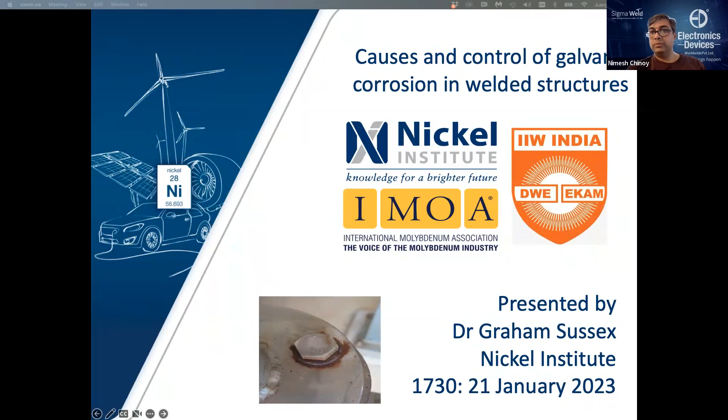Host, hello Sachin. Already passed to Mr. Jung. Thank you, I got it. Nimesh, how do you want it? You want to have the main screen up already with the introduction of the welding topic and the hosts? Yeah, that would be good. Okay, let's see. Share screen 2. Yeah fantastic, that would be the one. We wait a couple more minutes, then you can start with the introductions and I'll welcome everybody. Correct, we'll go on mute. Darren. Except Graham, of course. Maybe after an hour or so. Yeah, right.

Just while people are joining in, another 2 minutes.

We just recently, today was the last day at the National Welding Seminar at Chennai in India by the Indian Institute of Welding, and they celebrated 50 years of the branch's inception. It was a good session. We had a lot of talks from senior scientists from the Indira Gandhi Center for Atomic Research and other places, and it was a good 3 days of many interesting topics of discussion, including some 3D printing with metals and also a lot on the nuclear side. So I think all in all, it went well.

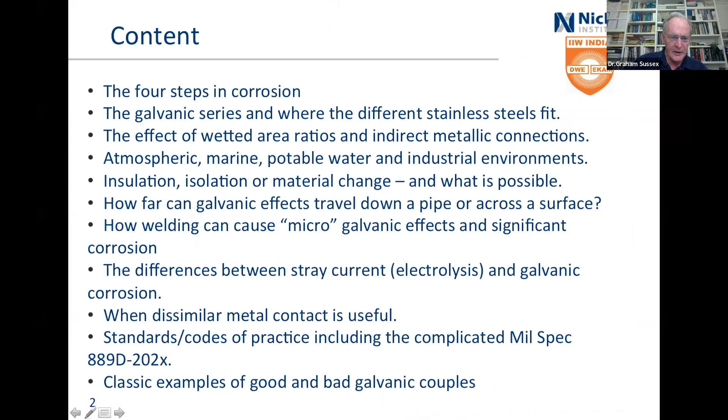This is the 4 steps of corrosion. Everybody thinks that it's basically the piece of metal falls apart and releases positive ions, but it also releases electrons into the metal, because obviously you can't go separating charges. So then the electrons flow from there to the cathode. Now that may be a metal, it may be all sorts of things, but yep, it does that. The third step is those electrons reacting at that point. The final bit, and the bit that's absolutely critical, is that you've got to have an electrolyte, and the electrolyte has both the anode and the cathode in it. So you need all 4 of those, okay? If you stop any one of them, then the corrosion just stops dead.

If you're talking about dissimilar metal corrosion, then you may wind up with precipitating a metal if it's in a solution of ions, or if you're talking about a piece of stainless steel, then you may wind up with the electrons just forming hydroxides with the water or the oxygen. You can fix it up by changing the materials or changing the environment. And if you're talking about dissimilar metal corrosion, you won't get an acceleration effect unless one of the metals in the pair will corrode or be close to corroding. Otherwise it just doesn't matter. So if you're putting, say, 304 and 316 together and they're in a solution where neither will corrode, then you'll get absolutely no effect.

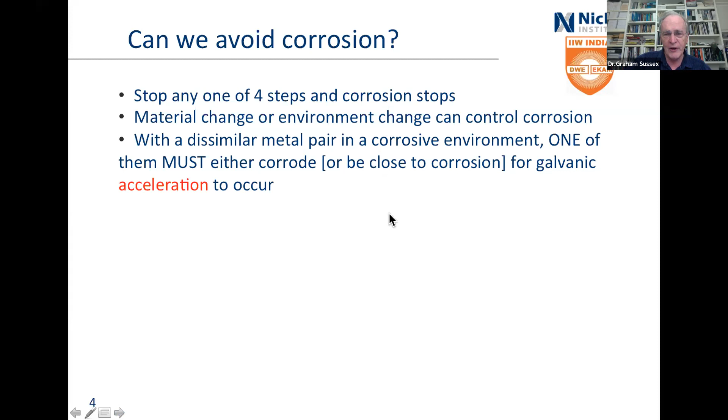If you're talking about submerged or buried environments, you can actually apply an external current - that's nothing to do with dissimilar metals, that's just applying a current. You can get cathodic protection, which decreases the attack, or you can have stray currents. I'll talk a bit later about stray currents and how they're different from dissimilar metals. Basically, corrosion is an electrical system, so you can fiddle with it by applying currents.

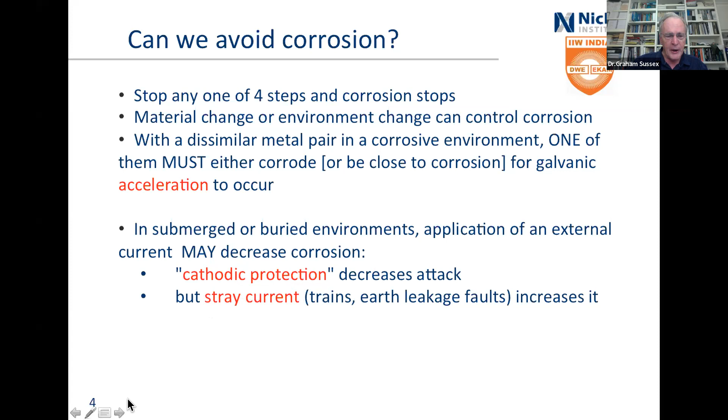This will be very familiar to people. This is straight out of ASTM G82, and the references here - you've got various metals and they have various potentials, measured against a saturated calomel electrode, which is convenient laboratory equipment. You can also use silver chloride, copper sulfate, or for research work, though rarely done this way, a hydrogen reference electrode.

These things go from very, very dissolving metals at the bottom, right up to graphite at the top corner, where you get no corrosion basically. This chart is for flowing seawater at about 30 degrees C, and note there are little black bits on, say, 316, or a white bit open - that's basically the two states it can occur in.

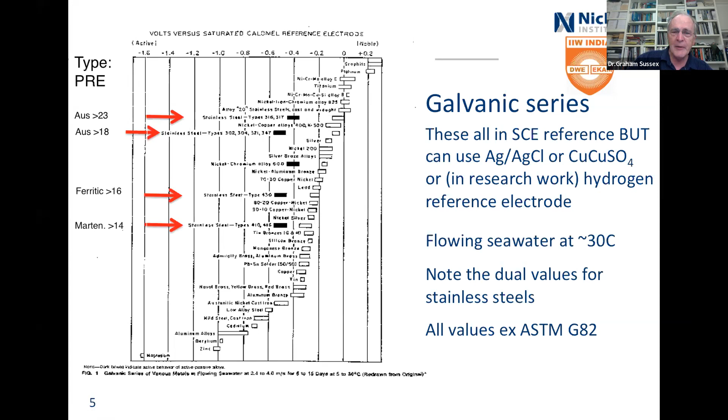If it's white, that's where you want it to be - it's not corroding. If it does break down and start corroding, the potential pulls back down there. That's the same thing that's happened for 316, for austenitics at 18, so a 304, down to a ferritic at about 16, or a martensitic at 14. All the stainless steels have this dual arrangement, but because you don't want your stainless steel to corrode, it should be in the zone with the open square.

There's an FAQ on the ASSDA website which has much the same sort of thing. This is a similar chart, but rather less cluttered, just to show you a little more clearly - it's for seawater at 10 degrees C.

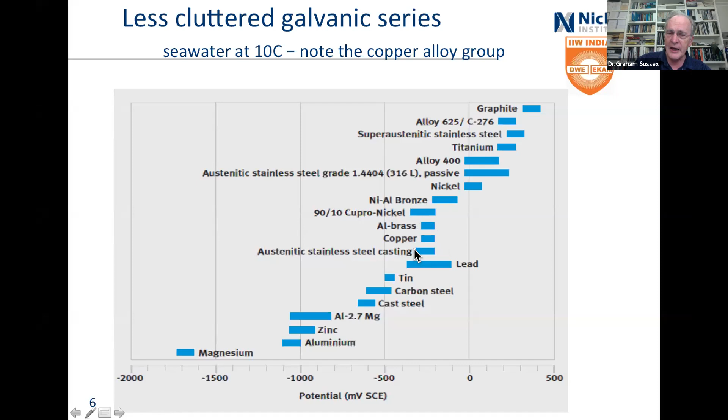What I'd like to point out to you is this group of alloys: nickel aluminium bronze, 90-10 copper nickel, aluminium brass, copper, even austenitic castings, are all at about the same potential. So if you connect them together, it's really not going to be an effect in terms of dissimilar metals.

There are other things outside though. This is from Roger Francis's stuff, published by Francis and Byrne, looking at a super duplex stainless steel in seawater. So normal seawater, it sits at about that sort of potential.

You've got a biofilm on the surface, you've got a bit of oxygen there. If you heat the thing up, 20 or 30 degrees more, then no biofilm, no potentiation of the oxygen, and so it drops to there. You can deliberately deaerate it, pull it down to there, or if you completely deaerate it, down to that point. If you want to go the other way, then chlorinate it.

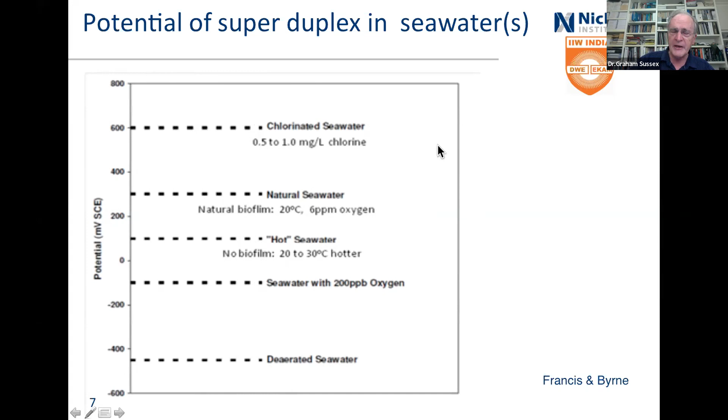Put in 0.5 to 1 milligram per litre chlorine continuously - that's quite a bit, but still. What I'm saying is that it's not only a matter of the material itself, but the environment it's in. I've just been talking about oxidizers - chlorine and oxygen - the microbes, and the temperature, because the temperature does things for the microbes.

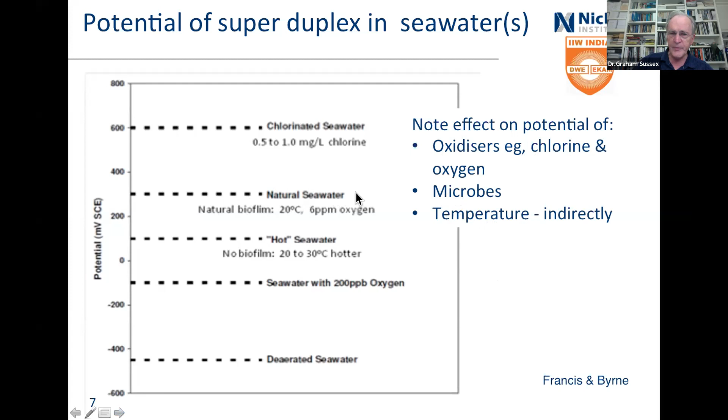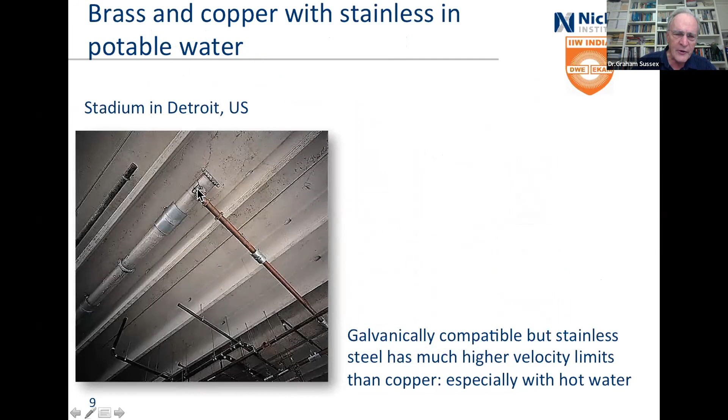Low galvanic - this is an example, a stadium in Detroit. We've got copper here, we've got a bit of brass - oh no, there's no brass there - and this is stainless steel, no corrosion. This is in a hospital in Scotland: brass, stainless, copper, stainless steel. They're all compatible because of their fresh water.

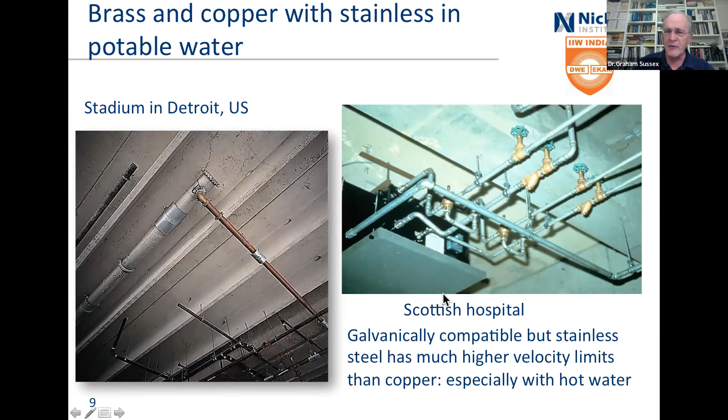This is a freshwater series, and the reason I'm putting this one up is because the graph is reversed. So here we've got the high potentials or low potentials on that side and high on this side, and still we've got the things that are going to corrode right down this end and the things that aren't going to corrode down the far end, and you've still got the sort of S shape in it as well.

Again, you've got this batch in the middle where the potentials are all about the same, so if you put any of those together, they're not going to corrode, not galvanically.

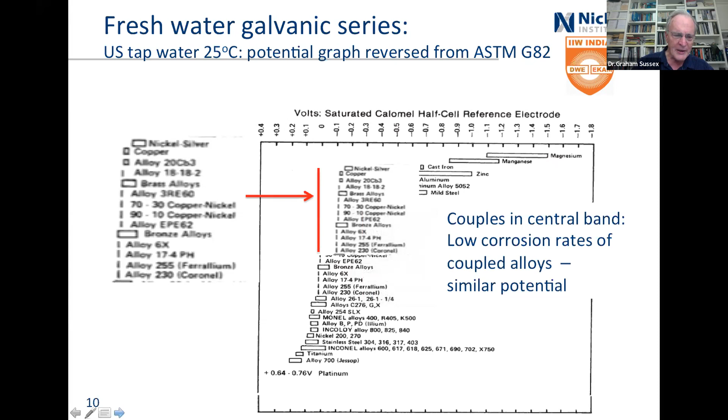But you can also get these sorts of charts in various other things. So here we've got tap water, distilled water and seawater in the middle, hydrochloric acid over here, and nitric acid over here. Why do you do that? Because you've got very, very strongly reducing hydrochloric acid, very, very strongly oxidizing nitric acid, and these are the sorts of potentials that you will get on various metals. This is basically putting a line rather than the names of all the various elements.

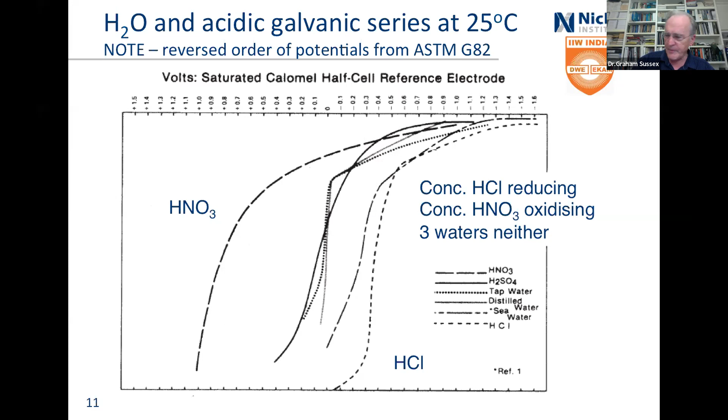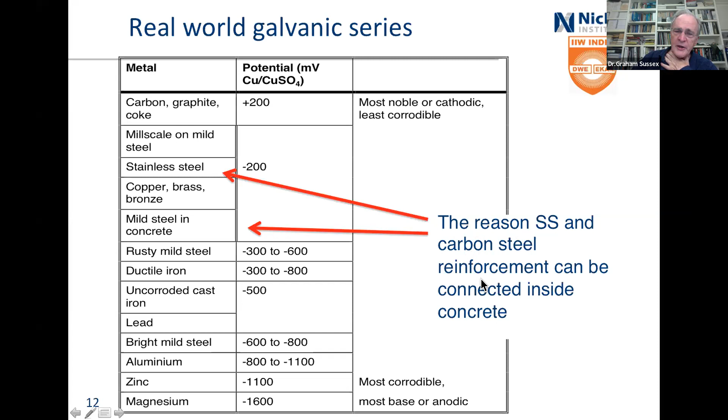Real world, things are a bit different. I just thought I'd put this in to give you an indication. Here we're talking about stainless steel, mild steel in concrete, and they're about the same potential, which is the reason why stainless steel and carbon steel reinforcement can be connected inside concrete. It's one of the questions that keeps coming up, despite the fact that it's been absolutely proven for a long time, 20, 30 years, that you have no problems putting those two together if they're inside concrete, and it's simply because the pH is way up.

Okay, so let's look at some real examples. Here is a bit of a stainless steel tank, and here is a copper pipe coming into it. As you can see, the copper pipe has got quite a significant bit of corrosion. Why? Because there's an enormous area of stainless steel, and so it overwhelms this. So it's not just the potential, but it's also the relative area of the two.

Here we've got, it looks beautiful, doesn't it? But it's all rust. It was a tank, a bolted tank, and they started getting leaks. So they put in a piece of stainless steel inside to bolt things up to it. What they didn't do was isolate it from the tank, because it's a painted tank. At the cut edges, there was an exposed amount of steel, and so it corroded, and it very rapidly got this sort of appearance. They wondered what on earth it was. It was pretty straightforward, but they just had to change the way they put it together.

And when I say treated water, it's basically the water that's used for flushing toilet systems.

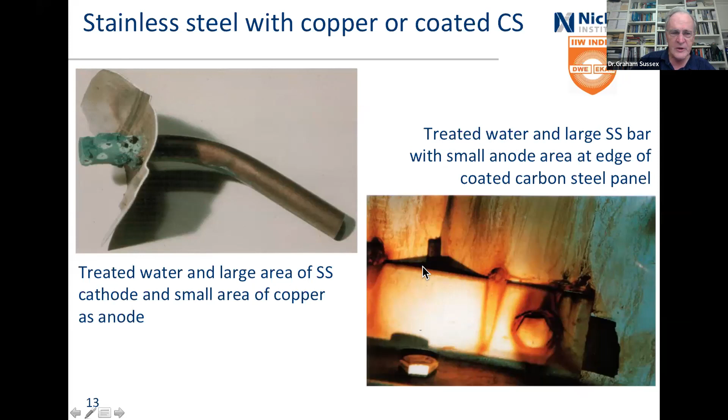And the inherent passivity of the stainless steel - I'll talk about this a bit later in terms of numbers - but there isn't an awfully good effect as a cathode, actually using the electrons up by the stainless steel. And quite apart from that, it's fairly obvious that there would be anodizing to actually prevent the corrosion of the aluminium as well.

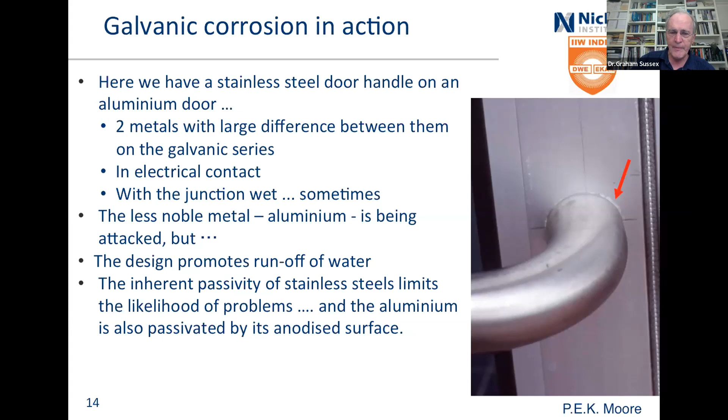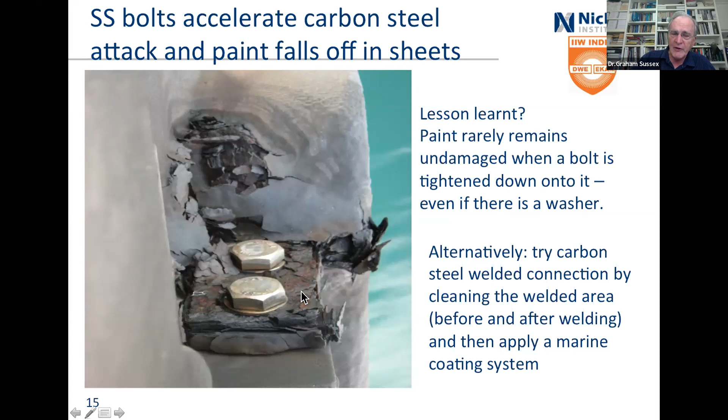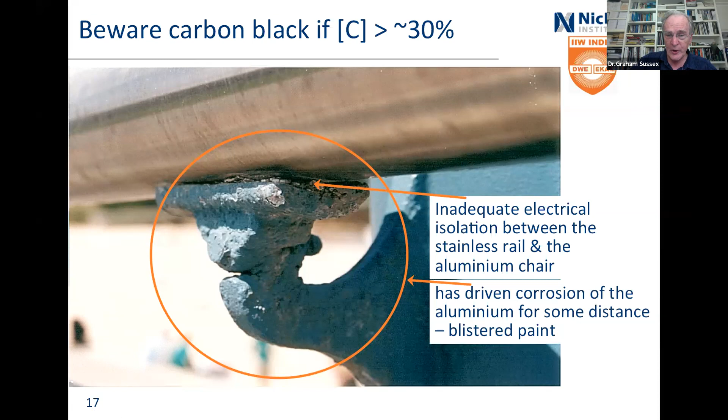So what you can see is that you've got attack of the aluminium underneath the paint, and the paint's blistering off. So it's driven corrosion down here, and you wonder what's going to happen. Well, that's what happened - the whole thing fell off.

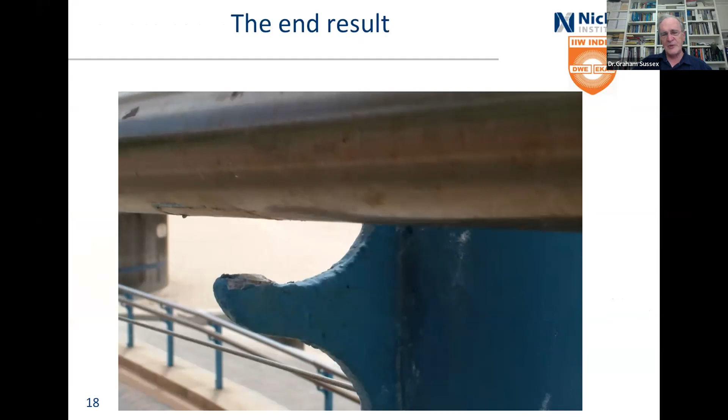Now how could they have fixed that? Well, they could have used a proper insulating material, but in fact they should have thought perhaps and put stainless steel on this support.

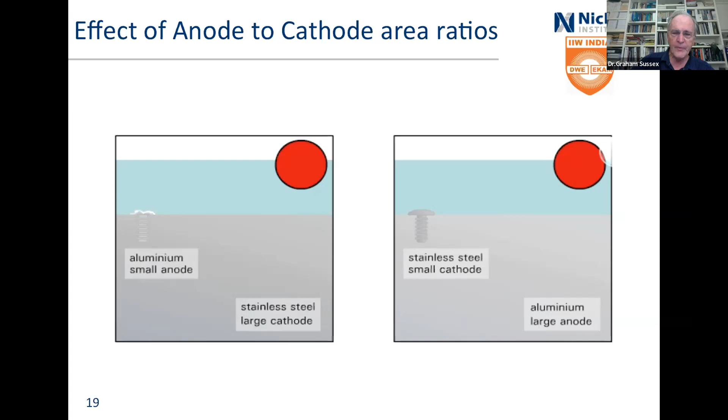How do you get around that? Well, you could paint the stainless steel and paint the aluminium. Both would work. Rather difficult to actually avoid having the connection underneath.

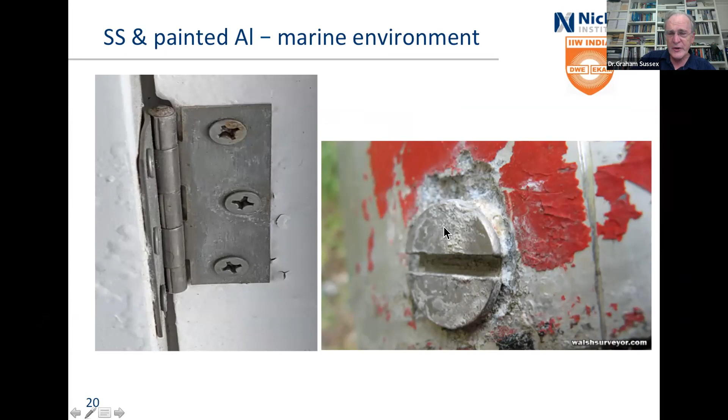And this is the other example I showed on the front page. Here again, you really are going to have a problem with this sort of fitting. Yes, you could paint the whole thing, and you'd have to paint all over the stainless steel, or you could weld the whole thing, and then, yes, okay, if you're welding aluminium to aluminium, that's fine. If you're welding stainless steel to aluminium, bit interesting, but you'd need to have some sort of coating to stop the thing.

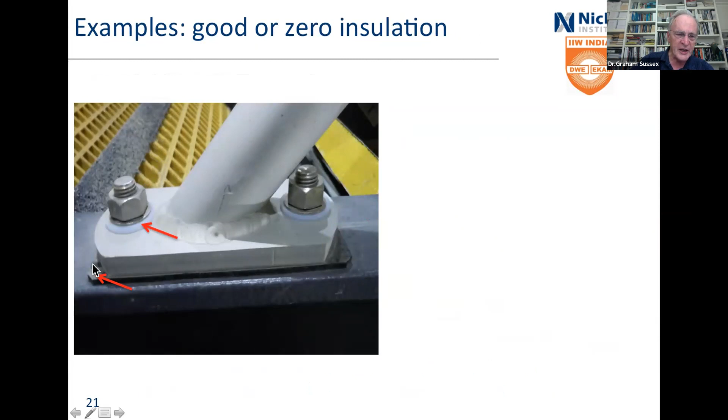And yes, that's basically what I've said - you can put in insulation. Obviously here we've got steel, here we've got aluminium, and washers there, keeping them off. And this is the example on the front where there's no insulation at all, and it's just a standard 316 fastener.

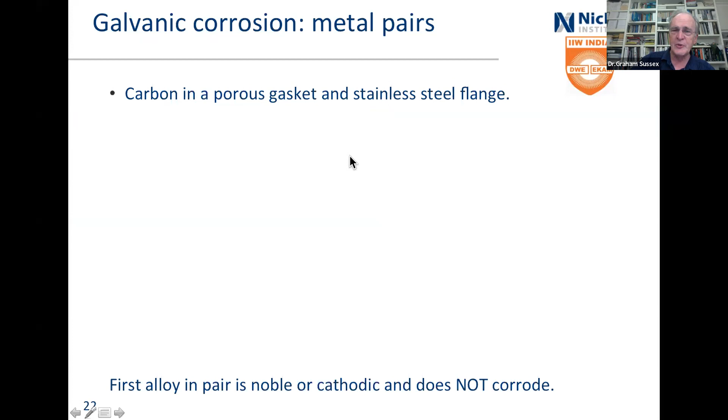So let's look at a few examples. Carbon in a porous gasket on a stainless steel flange - well, you've already seen that with the super duplex. Stainless steel and aluminium, think about the door handle - yep, it may be okay because stainless steel is not a terribly good cathode, and the aluminium, it's well different, but it may well have an anodized layer on it.

Stainless steel and galvanized steel, the severity there is very much going to depend on the environment, because if it's a strongly corrosive environment, then yes, this galvanized steel will suffer. But if it's reasonably inert, then you probably won't get terribly much. Mind you, both of these need a reasonable amount of rainfall on them in order that they're not going to actually corrode, full stop. Stainless steel and carbon steel - well, yes, every time you get that, we have all sorts of strife.

Galvanizing and carbon steel - let's get away from stainless for a moment. It's okay for roofing, old galvanized. In Victoria, or in Australia, they call it galvanized iron when they actually mean galvanizing on carbon steel. But if you look at the old system, they used to have galvanized pipes going into hot water tanks.

And in some waters, some bicarbonate waters, if you got the temperature over about 65, there was a polarity reversal. So the galvanizing didn't dissolve, the carbon steel dissolved. So every now and then you need to think a bit carefully about what's going on.

Carbon and aluminium, well, yes, they're far apart. Do you ever get a problem? Well, yes, I've seen a couple. One was an aluminium tray truck used for carting carbon black, and they spilled bits of it. They got some salty water on it, and they wound up with holes in their truck.

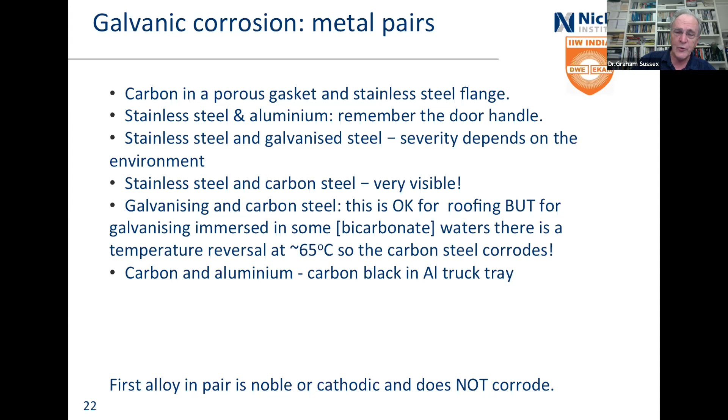And carbon black loading in insulating washers for roofing screws, Tek screws as they're called here. If you get more than about 30% carbon, you can get continuously conducting electrical networks, and away it'll go.

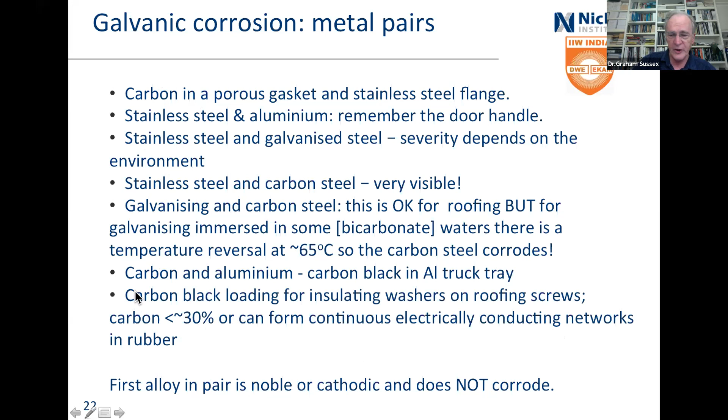In each of these pairs, the first one listed is noble or cathodic, and it's not going to corrode. So I've talked about what corrosion is, what potential ranges there are and how they can change, and a couple of examples of galvanic attack.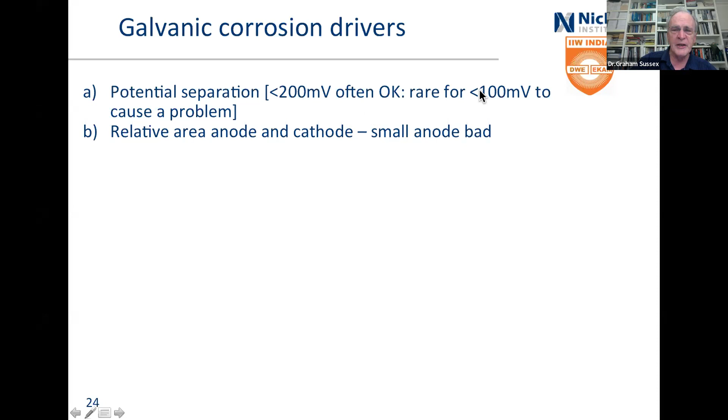And that's what this example is about. The thing is that stainless steel really isn't a terribly good cathode. It has a fairly low passive current density, around 10 nanoamps per centimeter squared, nano as in 10 to the minus 9. Both metals are going to be at the same potential if they're corroding because they pull in together. But the Tafel slope for stainless steel is about 120 millivolts, and you need at least a microamp per centimeter squared to corrode. I'm getting awfully electrochemical and technical, but basically I'm just trying to point out that stainless steel is not a good cathode, and that's why.

Physical distance and geometry, how far apart things are, can be quite important. Talking about pipes, it's going to depend on the diameter of the pipe and the conductivity of the fluid. In seawater, you've got about 10 diameters for 50 millisiemens per centimeter versus about 3 diameters for freshwater. Keep that in mind when you're putting in a separation or a sleeve down a tube on a heat exchanger—it depends very much on the conductivity of the material, how far down you've got to shield, and the corrosivity or oxidizing capacity of the solution.

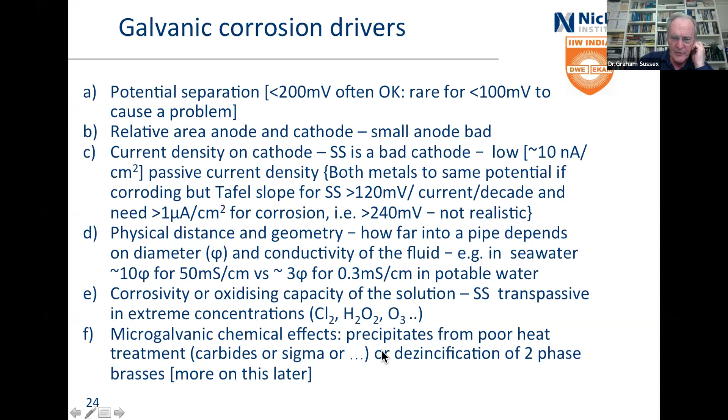This is to give you an indication of how far apart you have to have things before you don't have to worry about what's going to happen and what the environment is. This is looking at zinc protection across a carbon steel flat surface because it's a relatively easy thing to measure. Surprising how far things will go. At 100% relative humidity, you get very little protection, very little conductivity through the film that's on the surface.

If you spray it with deionized water cyclically, nothing's going to build up—it'll wash clean. If you're putting tap water continuously on it, the tap water is going to be a bit more conductive, depending where you are, and it's going to spread a bit further. Urban atmospheric conditions basically depend on whether you're down beside the sea or out in the middle of the desert or in a standard urban environment. The tap water cyclic spray versus continuous tap water—there's not a lot of difference, but you can get building up concentration, giving a bit of conductivity across the surface. Then there's sodium sulfate spray, seawater spray at 5%, or continuous immersion.

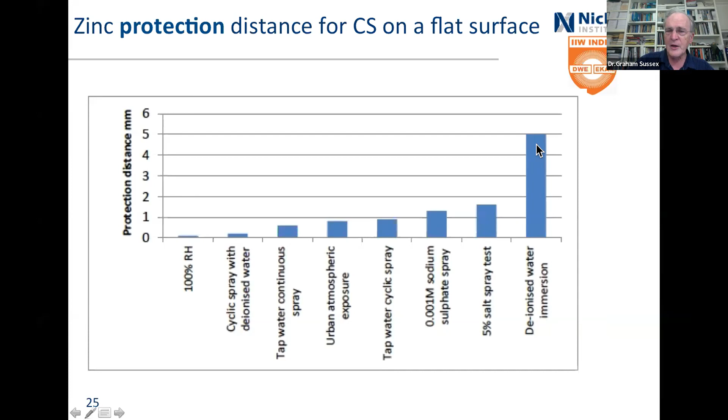With deionized water, it's not a great conductor, but it's still enough that you could go 5 millimeters or so out. What does that mean? It means all the electrochemistry is happening—if you've got a fastener or something sitting there that's going to cause galvanic corrosion, then the area around it, in this case within a 5 millimeter diameter circle, is also going to contribute. If you had seawater, you'd go out even further. So effectively you're measuring the resistance of the thin surface film.

This is perhaps a more interesting example looking at galvanic corrosion. We're looking at hot dip galvanized steel sitting there, there, and there - the light blues - and the hot dip galvanized connected to a bit of stainless steel, at 6 times the area of stainless steel to the galvanized, so it's a bad ratio. And then we're looking at corrosion rates there in micrometers per annum.

In the urban atmosphere, not much difference. Near a steel mill, so you've got sulfur dioxide and things like that. Coastal areas where you've got salt, sea salt and so on. But it goes really through the roof when you talk about what happens with splashing - you're getting splashing on the surface, concentrating up, and away it goes.

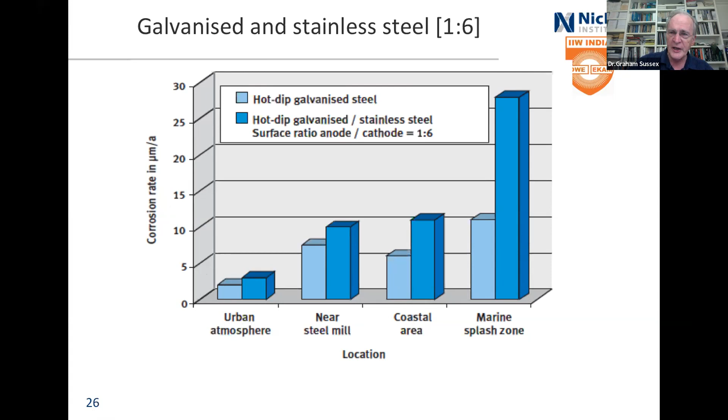This comes out of a Euro Inox publication, and there's the reference table at the end. It's basically saying the definition of galvanic corrosion: you've got an anode, a cathode, and an electrolyte sitting on top. It doesn't talk about the 4 steps, but basically the critical bit down the bottom is that one of these has actually got to be able to corrode in the electrolyte that's there. Otherwise it's got to corrode or be close to corroding, otherwise there won't be any galvanic acceleration.

I've said it before, but I'll say it again: if the cathode is going to be stainless steel, then it's not terribly efficient, and so it may not be really bad.

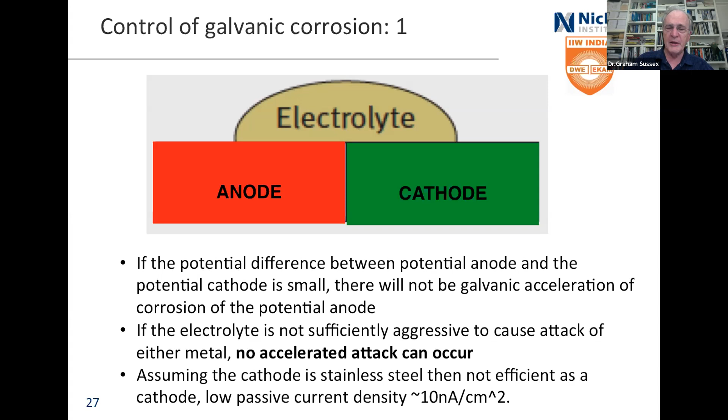Look, I know people will say, hang on a minute, what about if we put a carbon steel bolt in, or we put that washer in? Yeah, sure, it's very visible. It's not so visible if it's aluminium. It's not so visible if it's galvanizing. And it's still there, but it may not be a serious effect.

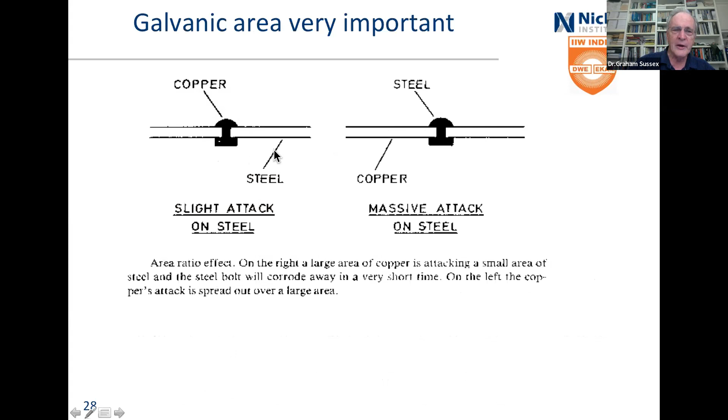And the galvanic area is very important. This is back to looking at Davy putting copper onto boats to get rid of woodworm - wooden boats. He found that the steel corroded very rapidly, and that was a problem. So then he started using the other way around, and it worked quite well, except that he didn't have enough copper there.

If the area of the anode is more than about 10 times the cathode area, galvanic corrosion is not all that likely, and it really doesn't matter all that much what the potential difference is. That's not completely unlikely, but at reasonable levels of difference, the 10 times ratio is pretty good. If you're the other way around, and the anode is 1/10 of the area of the cathode, then you're likely to be in trouble at really quite low potential differences.

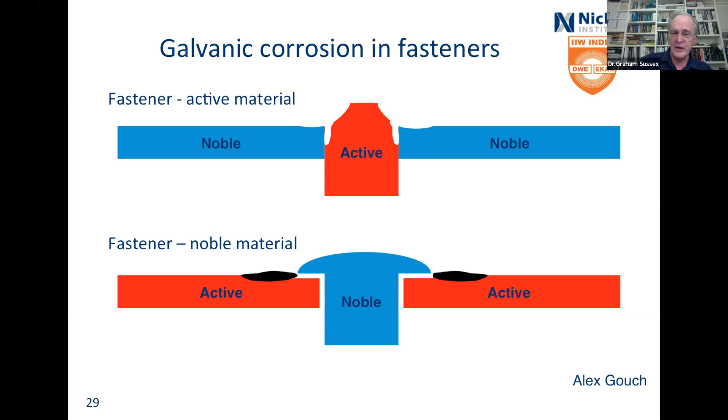So in fasteners, this is a little model: we've got fastener active, fastener noble, and what's going to happen? It's going to corrode like that, it's going to corrode like that, and it's going to fall out. That's not good. Basically what this is saying is that fasteners should always be down the bottom, more noble, and then you can get some corrosion either side, but that's not going to be really a problem. Except that if you weren't too careful about putting it in and it doesn't fit too well, then you can wind up corroding away the active material next to it, and you get a loose bolt, and eventually a loose bolt falls out.

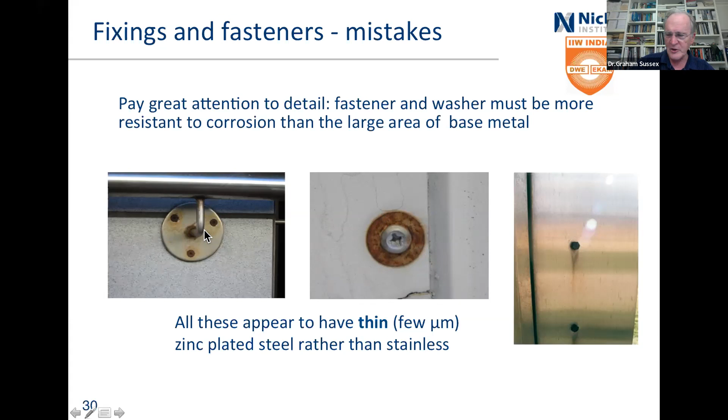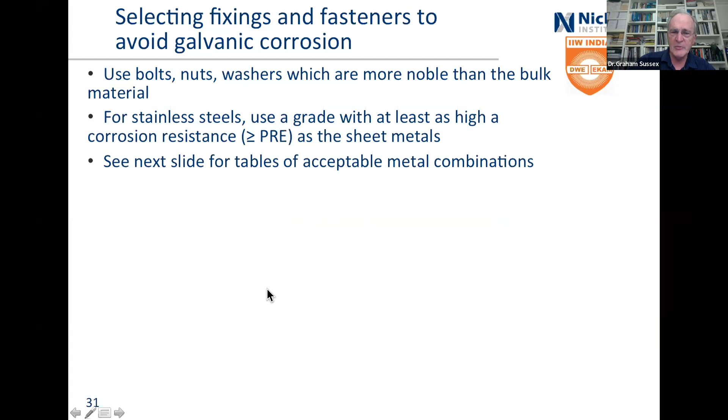So bolts, washers, nuts, they've got to be more noble than the bulk material. If you're using stainless steel on stainless steel, then you'd use the same or higher. But remember, PRE gives you the raw numbers, but if you're looking at stainless steels and the environment isn't too bad, then it's not a terribly good cathode.

Next slide's got some tables of acceptable metal combinations. And if you're going to have to join dissimilar metals, then use some insulation. Now, clearly, if you're welding something together, you can't put insulation in there, just not possible. So we'll talk about what we do then in a moment.

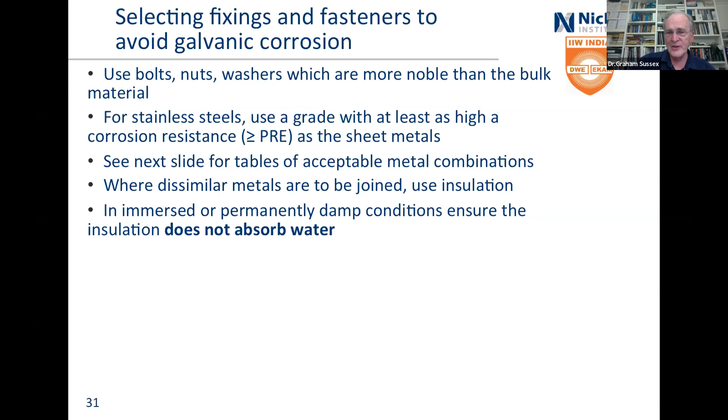If you're using insulation and it's going to be permanently damp, then you need to make quite sure that the insulation doesn't absorb water. There are some nylons that do absorb quite a bit of water, and there are other materials that do as well. So you just need to check that.

And then if you're going to insulate, you do insulation between in that direction, but you also sleeve it down here. Now you can either do it with top hat washers or just put a sleeve around that. Some diagrams leave out the sleeving around the bolt, and then you've got the probability of getting connection between and then down and around, and you lose your insulation.

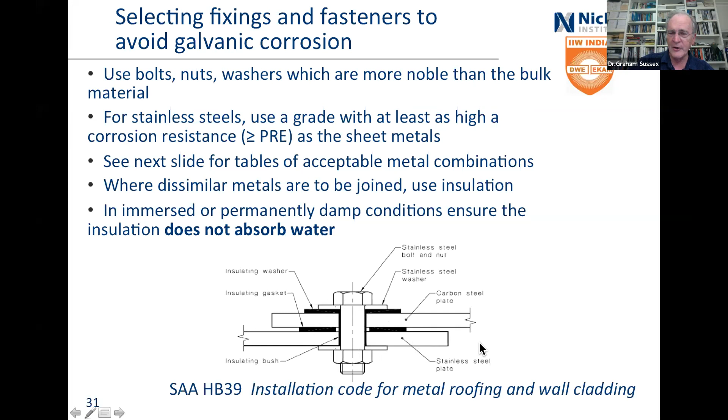Okay, back to the electrolytes. This is how you control galvanic corrosion. You make sure it's dry, or you exclude the moisture somehow or other. You make sure that you don't actually get moisture going between the two. You can put a coating, and it's shown here that you put the coating on the cathode.

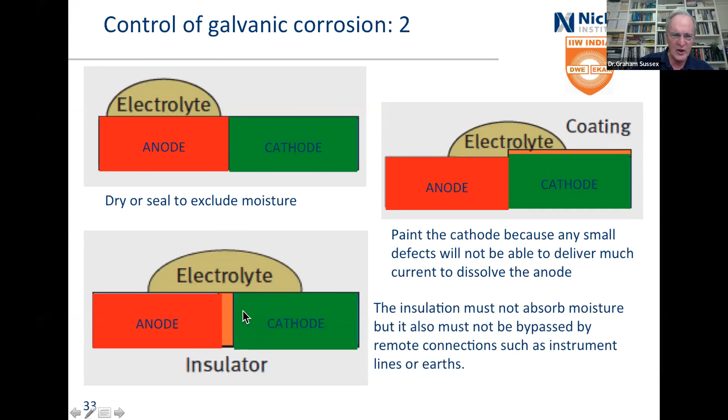I can remember looking at a submarine where there was some instances of coating, and somebody who really didn't know about corrosion was saying, okay, we'll coat over there, and I had to point out to him that no, it wouldn't work. Paint the cathode - any small defects will not be able to deliver much current. And insulation, if you've got insulation like this, then it also must not absorb moisture, but I've said that before.

Okay, so let's get serious about looking at welding and corrosion, or galvanic corrosion. Here we've got a lovely piece of stainless steel down the bottom, and here we've got a piece of painted carbon steel up the top. And we've got corrosion around there and draining down there, and that's not good.

What happened? Well, the first thing that happened was that they didn't clean all of the muck off the weld, so the paint just fell off. But typically, you need perhaps 20 millimeters - remember that diagram I showed, how far you can spread, how far you can throw the effect?

It works both ways. If you're trying to protect, it's good. If you're worried about corrosion, so if you're worried about this acting as the cathode and there's the anode and there's no paint on it, then you have to go a further distance away, greater than 20 millimeters, maybe up to 50 millimeters, just depends how corrosive the environment is.

You need to make sure you've cleaned the heat tint off and cleaned off all the muck from the weld, and do it mechanically, preferably, because if you don't, if you're doing it chemically, you wind up just etching the carbon steel as well.

And then you paint it, but you do not, under any circumstance, use an active paint. You don't go using zinc rich, because you put that onto the stainless steel, and if there's any defects in the coating - mind you, zinc rich would be a primer, of course - if you do that, then you wind up with all sorts of corrosion between the zinc, which is right up one end of the galvanic series, and the stainless steel, which is halfway up.

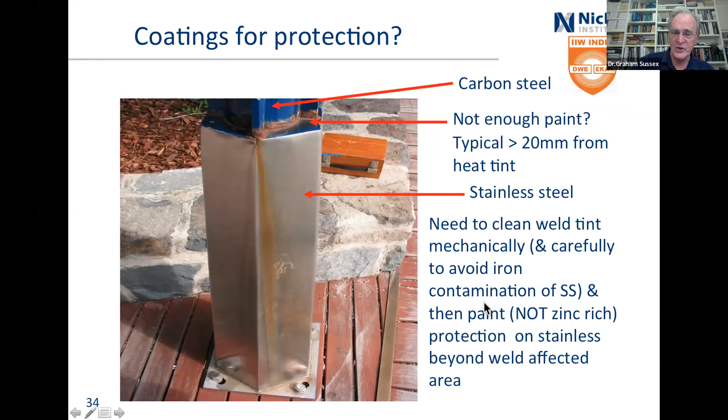And this is an example of that. Here we've got a stainless steel pipe, and here we've got a support, which is carbon steel, painted carbon steel. So you put a coating around there, but I'm emphasizing no active primer.

The width of the stripe depends on the environment, how conductive any film might be. Remember the diagram further - if you're down beside the seaside, you have to go further. If you're directly one above the other, so water can run down over it, you've probably got to go a bit further. But if it's something above it, it may not be quite so bad. You'd have similar protection of carbon steel brackets if you're talking about a vessel with doubler plates on the outside to go to your carbon steel supports.

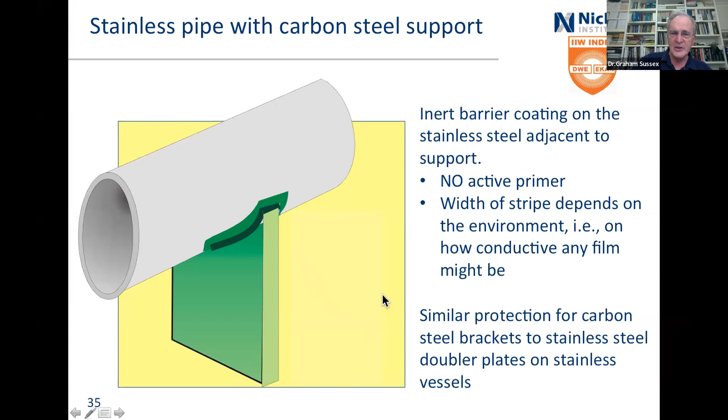Atmospheric galvanic currents flow through surface moisture films, and they're bad near the sea. Fertilizer is perhaps a problem if you're out on farms, or in the Middle East where lots of salt blows around on the sand and sticks - that can be a real problem. For immersed things, seawater allows wider collection basically because it's more conductive. For fresh water, in Australia the conductivity goes from 10 milligrams to 150 milligrams in most places, although Adelaide tends to go a bit worse.

It's really quite common to use coated ductile iron castings in potable water valves with a stainless steel overlay for the seal surface, because you don't really want to go closing down onto a coating.

Now you look at that and say, well, hang on a minute, now you're coating the actual thing that you're protecting. And yeah, it's true. But you do that and then put the overlay, or put this paint onto the stainless steel surface as well, so that you have less of a throw through the water. And remember, we're talking about potable water - reasonably low conductivity.

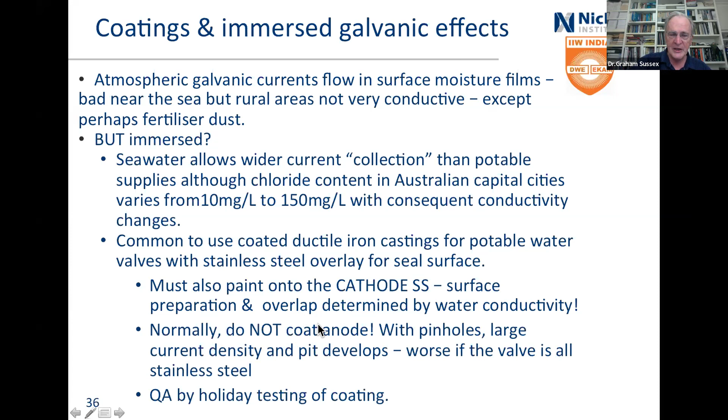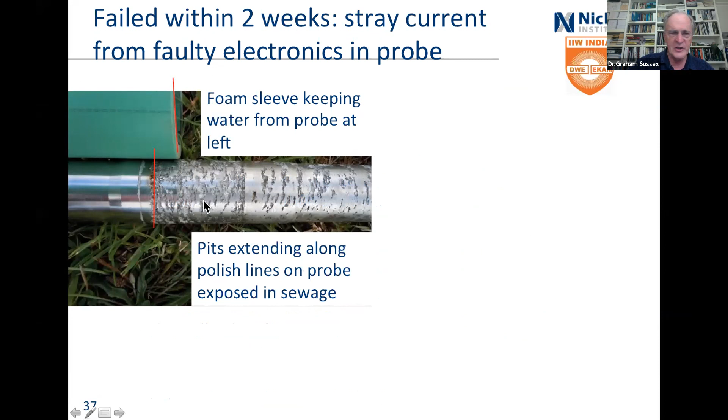Let's look at the bit where stray currents are a problem. Here we've got a sensor, which was actually immersed in a sewer pit because they wanted to measure whether they were going to have an issue and what their dosing had to be. When I pulled it out, this sleeve was up back here - sorry, when I took the picture I moved it. Here the thing's been polished round and round, and the pits on it are extended along the polish lines. That's not so surprising. Down here, that's the crevice where this actually sealed, because that's a tapered fit there, and that's just the flare.

How do we know it was actually galvanic? Well, it was stray current, not galvanic, because it was very quick. This is the end of this pipe. This was a plate that was on the end. Around here is actually the end grain attack of the end of that tube, because it's fairly close to the earthed stainless steel gate.

Here, there was a label, so there was no corrosion under that, but this is the end plate sealing the end of that pipe, and as you can see, it's corroded away there. You can see the surface has just basically been etched away, but not through the piece of paper. Quite amazing. And I know that was the problem, because the people who supplied this thing paid up for a brand new one, which was really good - it was 30 or 40 grand.

These are the mathematics for stray currents. If you're talking about aluminium, 1 milliamp per centimetre squared gives you this number of millimetres per year. For copper you get about that, iron about that, and zinc about that. So stray currents can make things corrode very rapidly.

They're reasonably easy to pick as stray current, but the cause of it may be quite difficult. It may be problems with earthing of the electrical systems after faults in a building, or somebody else has got some cathodic protection that's been done wrong, but that usually is reasonably well controlled. As I say, leaks in supply wiring, bad earth.

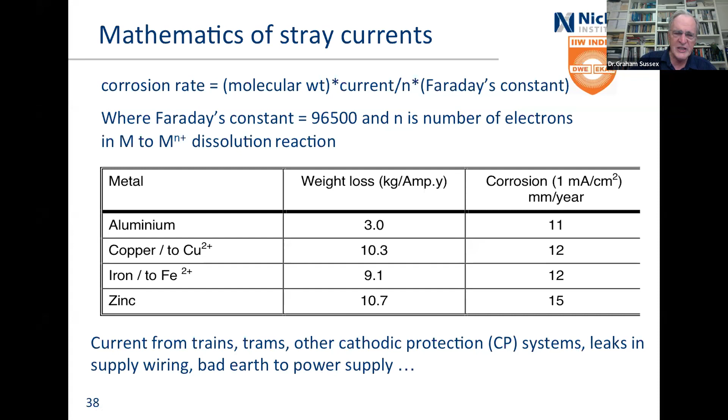One of the classic examples I saw was a copper pipe carrying the firewater around the building. It was loose wrapped because it should have been okay. But the earth of the building was a single banged-in bit of pipe into sand. And so it really didn't do anything.

Okay, how do you model galvanic corrosion? Well, up until fairly recently, people looked at a reasonably wide range of material couples and surface treatments and looked at immersed potentials, and they gave potential tables, material tables. It was a Mil Standard. It was applied in aircraft and all sorts of things where there were lots and lots of different treatments, and some of them were quite complicated.

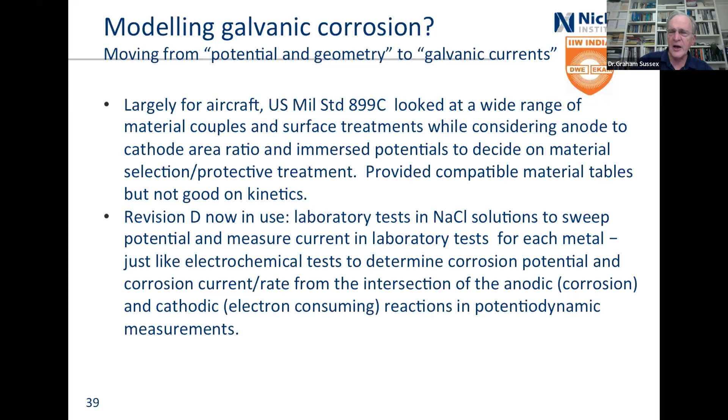That revision D, which is now in use, it's only been out for a little while, they used laboratory tests in sodium chloride solutions to sweep the potential, and that is a laboratory test. You basically start from the cathodic side, so it's not going to corrode, and you sweep through and measure the currents. And you can actually then do electrochemical calculations and work out what's going to happen. And you can then look at a whole series of treatments. And the next thing is a bit complicated.

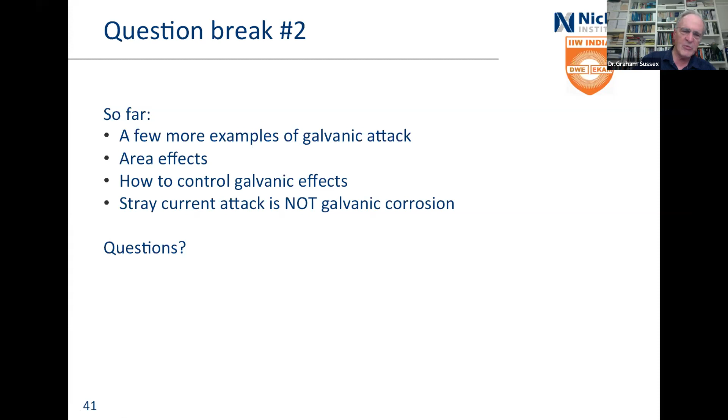If you're looking in a marine atmosphere, so there's lots of chlorides around, and again, magnesium, yes, weathering steel, not so hot, but that's partly because weathering steel doesn't like chlorides. Tin, yeah, that's now back being okay because the corrosion's gone up. Lead, bit doubtful. Nickel, a little doubtful, which is an interesting statement. But this is useful for a first past the post. And then you look at your area ratios, and then you look at the actual environment. How bad is the marine atmosphere? But this is in atmospheres, it's not submerged.

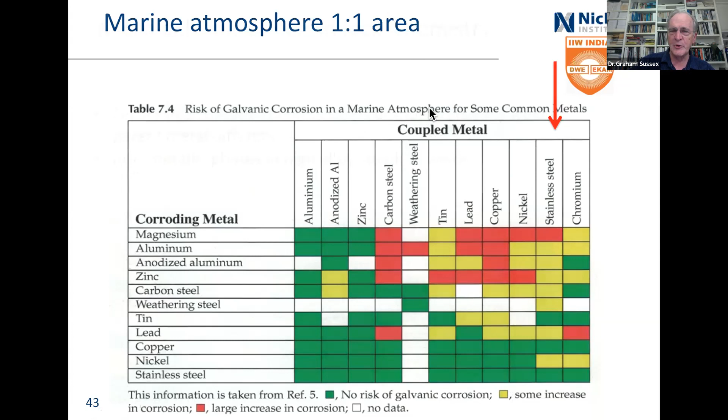So what about micro galvanic effects in local chemistry? This is ferrite and austenite. Yes, if the material is in an aggressive environment, then you can well get ferrite dissolving. There is a slight potential difference between them. It's not commonly a problem. And hey, you know why it's not a problem? And how I know it, because people use duplex stainless steels all the time, and there is very rarely problems in the galvanic effect.

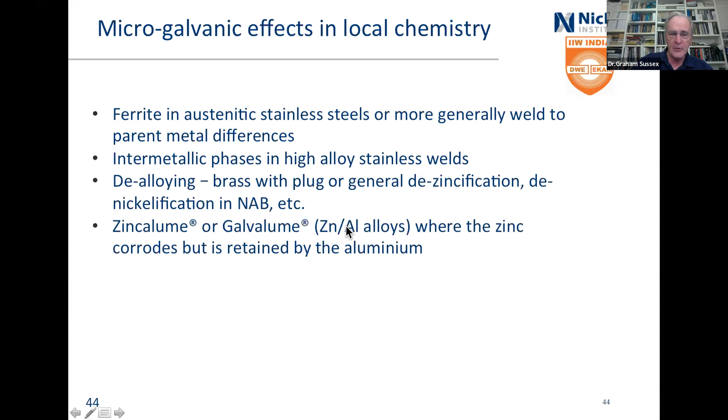Intermetallic phases in high alloy stainless welds, de-alloying with denickelification, or the plug or general dezincification if you've got people who haven't put the arsenic in, or they haven't heat treated it. And the zinc aluminum galvalume, the zinc aluminium alloys where the zinc corrodes, but it's retained by the aluminium. So that works. And these work basically for roofs. This is Australia, that's the States. And iron and aluminium - well, that's bad news, but it's nothing to do with welding. There was a rust spot problem there. There was rogue iron in some out of a major supplier.

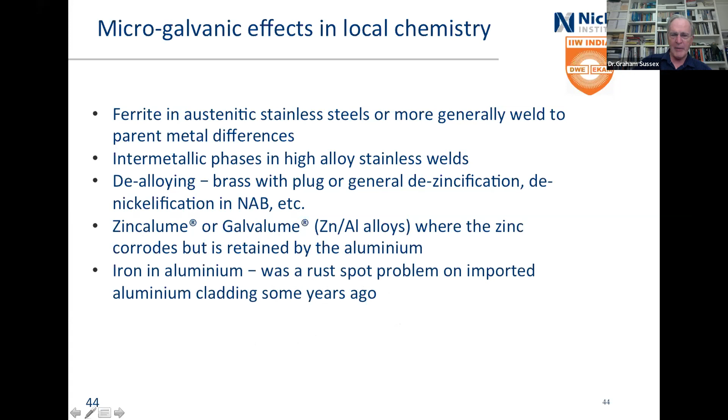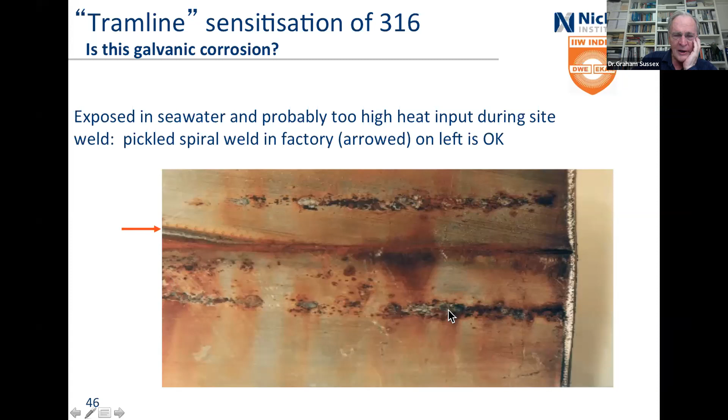Tramline sensitization - you do some welds. This is a spiral welded thing, and it's fine there because it was looked after. This is a rather rapidly done weld in some 316, and they overcooked it, so you got carbide precipitation. Why am I talking about this here? Because this is an area where you get chromium carbides formed, and they form like that.

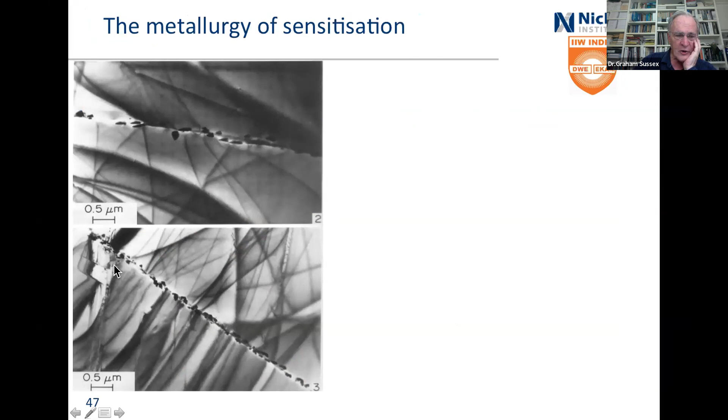If they're just scattered along like that, then they're okay, because the area around there is lower in chromium, and so it's likely to corrode. There's a differential there. And if they're contacting like that, then you wind up with carbide intergranular corrosion.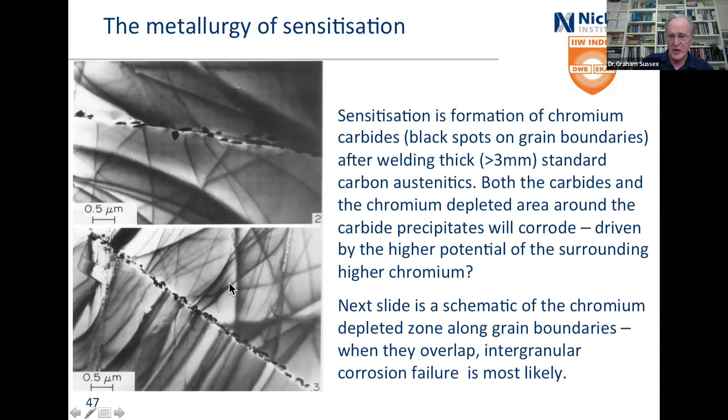10.5% is the limit for stainless steel, but the corrosion professionals tend to say 12% is the number you'd think of for corrosion resistance.

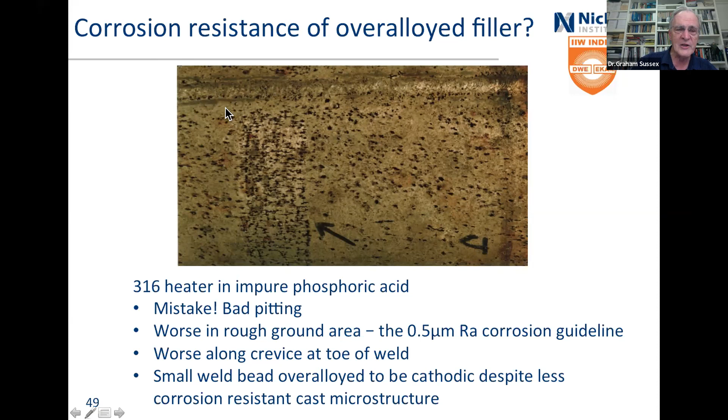This is a piece of 316. It was used as a heater in some impure phosphoric acid, and you can see very bad corrosion here. This is the sort of 0.5 micrometer corrosion guideline, pitted all over the place. Where it isn't pitted is along this weld. Why? Because the weld is over-alloyed, so you don't worry about losing chromium and getting a different potential. Basically, you're trying to make sure that the smallest thing there has got the highest potential and therefore is the most resistant to corrosion. And yes, I can see some pits along the bottom here, but that's a crevice basically at the toe of the weld.

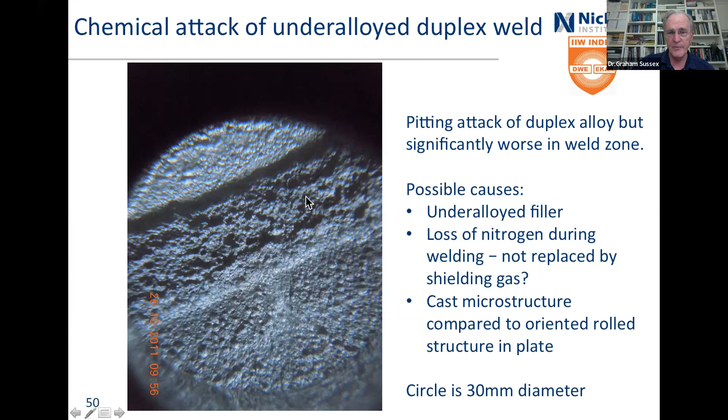Sometimes galvanic corrosion can actually be useful. Seawater pumps often have an austenitic cast iron body, a Ni-Resist one, which is anodic to the 316 internals, and so protects them, especially from crevice corrosion. And you think, wow, that's a problem - we've got corrosion of the body. Yeah, but look at the area of the body, and quite a bit of corrosion current can go without giving you significant corrosion. It's also used in smaller pumps, which have bronze bodies and stainless steel shafts. You definitely want to protect the shaft, but the body, again, has a large amount of material.

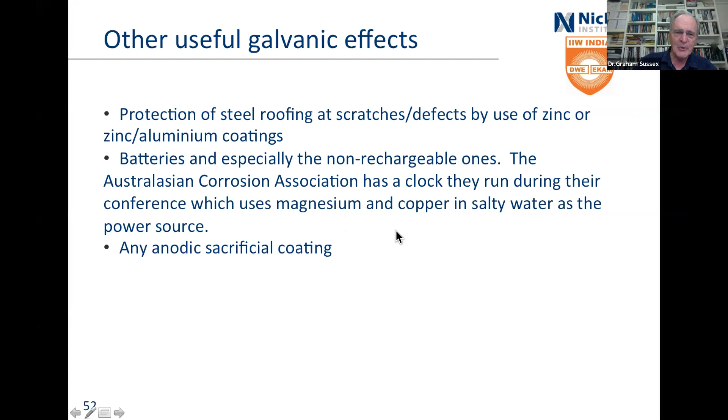Galvanized zinc aluminium or zinc galvanizing on roofs. Batteries - that's a classic use of galvanic effects, provided you make sure they're put together properly and they don't have nasty little fires and so on, but still. The Corrosion Association in Australia has got a clock that they run during their conference. They use magnesium and copper in salty water and start it at the beginning and stop it at the end. Any anodic sacrificial coating is also useful too.

How can you measure galvanic effects? Well, you can just use a high impedance voltmeter, please, or you can measure the currents with a zero resistance ammeter, or you can put a coupling resistor in with a sensitive microvolt digital voltmeter, and those are fairly easy to get these days. Mind you, they cost a few dollars, but still.

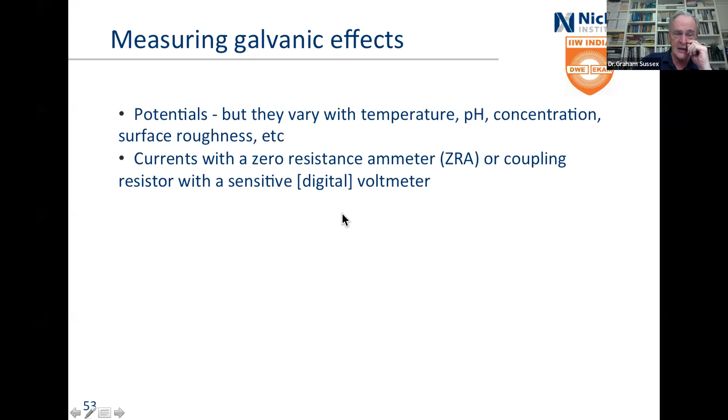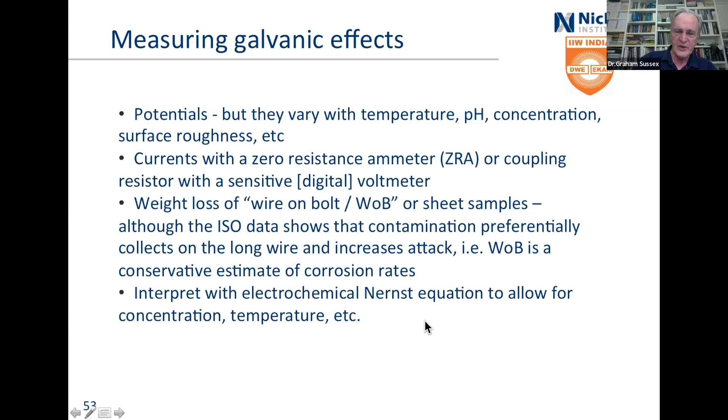You can measure it with wire on bolt things, which is what the ISO people do. They use that for things like wire, aluminium wire, and so on. It preferentially collects contaminants along the wire in the crevice because it's wound on a thread, and so it gives a fairly conservative estimate. Or you can go away and do Nernst calculations and pretend you're an electrochemist.

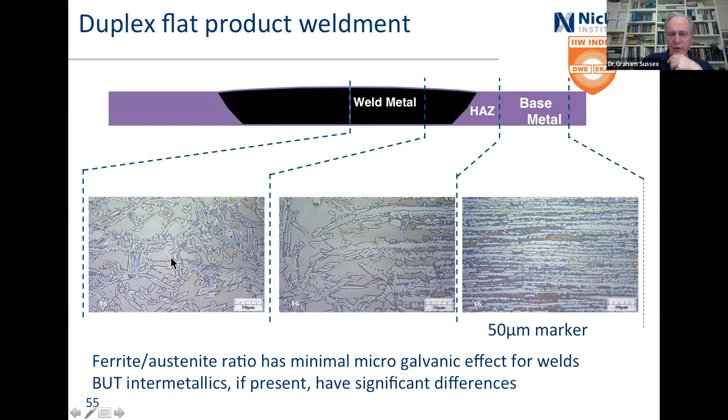Look, you're looking at welds. Welds are a disturbed sort of thing. This is the parent metal, this is the really disturbed area in the heat affected zone, and this is the jumbled up weld metal. You can have microgalvanic effects depending on where you are in relation to the weld.

If you're looking at high level duplex stainless steels, if you cool them down too fast you get too much ferrite. If you cool them down too slowly you wind up with all sorts of intermetallic phases and you get corrosion - and that's just right in between. This is the bit where you can get all sorts of galvanic effects, and I'm talking sigma phase and so on.

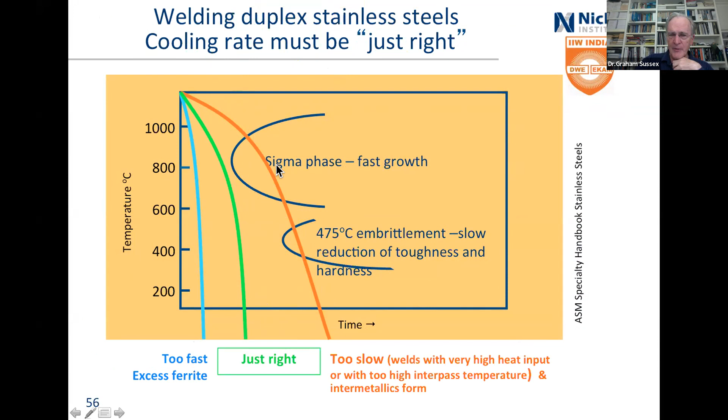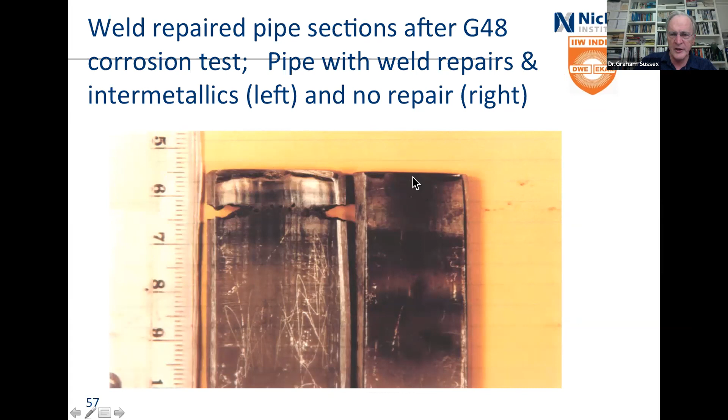This is an example of what happens if you have bits of pipe and people welding them improperly, and you get weld repairs. Then you put the things in a test solution - a G48 test, ferric chloride - and the ones that had been weld repaired looked like this. This is where the weld was. This one had not been weld repaired, and it looks beautiful.

And that's it. Oh, I just about finished on time. Now, what were the questions?

Where are we? Stop sharing - how do I stop sharing? There, done, yes.

Thanks, have a lovely rest of the weekend. Thank you, Graham, rest of the weekend Nimesh. Oh, of course, it's everybody - Saturday night, isn't it? Yes, hey, it's Saturday night. Have you had fireworks yet? No, not yet, it's still quiet. Another 3 hours to go, 2.5. Fair enough, okay, alright. All the best, thanks, goodbye, bye.